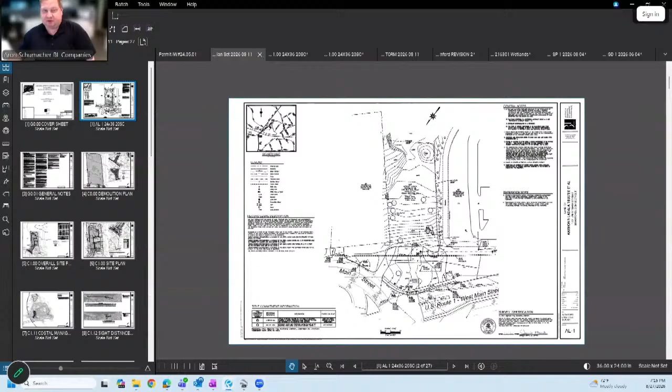This is the survey of the property. The wetlands that Matt mentioned is located to the south of the property, in this back corner, and that's subject to the upland review area.

We prepared this overlay of the old plan and the new plan. What you're seeing here in black and white is our current proposed site plan. What you're seeing in red is the previously approved site plan. And this magenta line is the upland review area coming from that off-site wetland located to the south.

So as Matt and Jamie alluded to, the main change here is we had a 1,735 square foot building. We've removed a bay from that, and we reduced the building to 1,335 square feet. Along with that, we've reduced the parking and impervious area on site and reduced the stormwater drainage system as well.

So you can see we've pulled back the limits of paving in the rear of the property. This is the old dumpster area. You can see everything shifted over, approximately the width of one parking space closer to the interior of the site. Most of the street side of the site has remained the same.

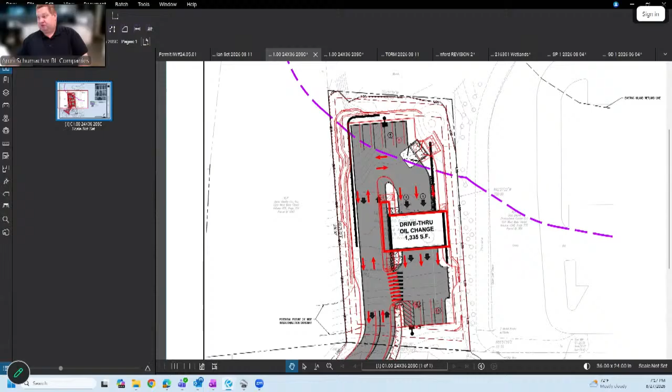As far as our coverages within the upland review area, we have approximately 4,000 square feet of area. Our disturbance previously was 2,000 square feet; we reduced that by about 800 square feet to 1,200 square feet. Of that, the impervious or permanent disturbance that's going to remain is 1,163 square feet, a reduction of about 780 square feet from the previous approval.

Just a quick recap on what the site is: you have the entrance here. It's going to be a drive-through oil change facility. Customers come in, loop around the back of the building, come through the building, get their oil change, and leave out the front. The parking on site is mostly just for employees.

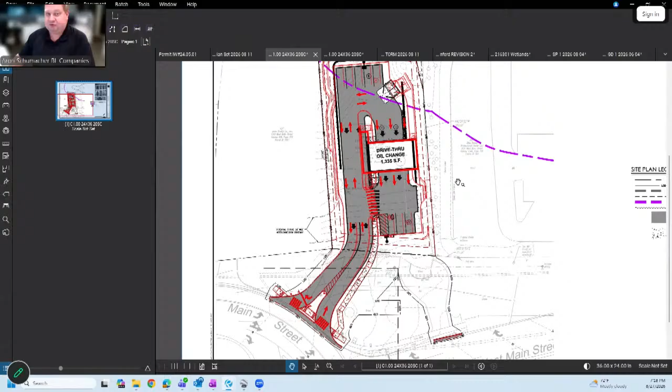You're muting. Oh, sorry. Can you hear me better now? Yeah, thank you. So the customers will mostly remain in their vehicles, just passing through as they're getting their oil change. The parking on site will be used for the employees and the staff.

I have another graphic here that shows the extent of the storm drainage and grading. Same thing as the last graphic - the red is the old proposed design, and the black and white colors are the current proposed design.

Previously there were two proposed underground infiltration systems, one to the rear of the property and one in the front. When we revised the plans and stormwater calculations, we reduced that to just one system in the front and removed the rear system.

We're still meeting all the standards of the Connecticut Stormwater Quality Manual as far as reducing peak rates and total volume for all storms, and we're meeting the water quality volume by infiltrating on site. We use an isolator row within our underground chambers and a hydrodynamic separator on site to help with water quality.

We did receive some comments this week from the town engineer, a few pertaining to sewer, so we'll work through those with him and the WPCA regarding permission to access the sewers for this site. He also had a comment about the stormwater report.

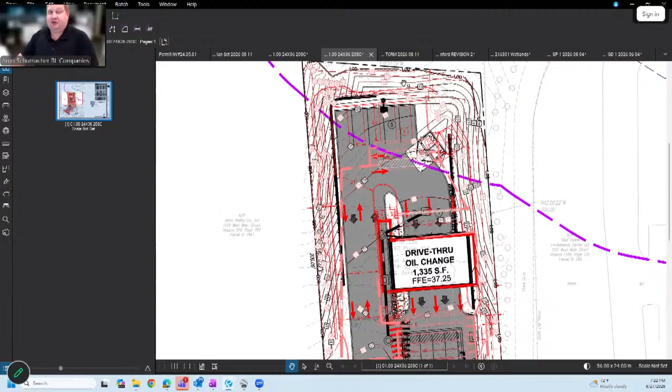Commissioner Boda asked: so those paved parking areas are all draining toward the infiltrator? Yes, let me show you on our proposed plans. This is the plan set that we submitted to you guys as the revised plans.

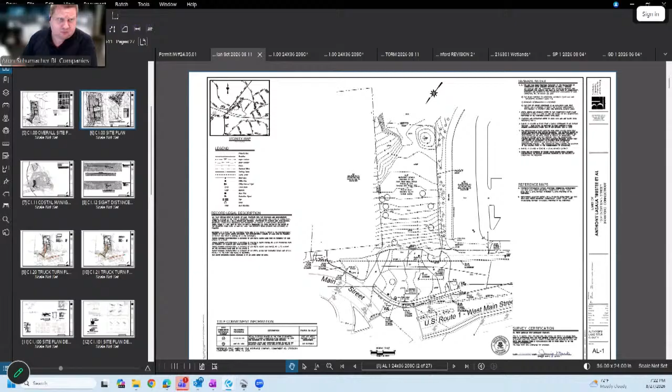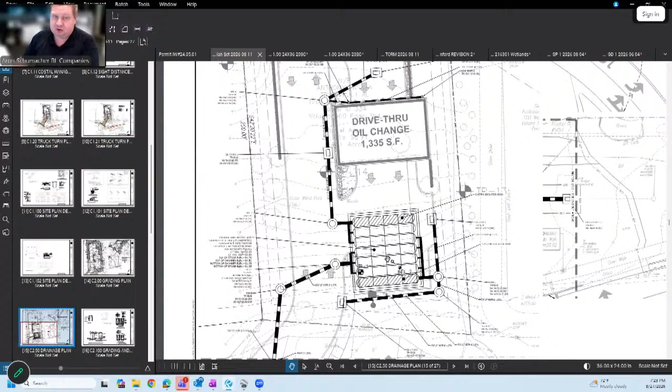This parking area here is all coming to the front of the site, discharging to this catch basin, which goes through the isolator row, through the underground system, out through the hydrodynamic separator, and then out to the front of the site.

If we look at the grading plan, the only area still discharging to our rear discharge point is this grass slope below the retaining wall, off the edge of the parking lot. Commissioner Boda confirmed that answers the question.

Is it curbed on that back end, the eastern side? This piece here would be curbed, yes. And what is that box structure that looks like TP1? This box structure here is our dumpster enclosure for the site.

The wetland line is back there. Is there anything preventing materials from the dumpster from moving back downhill? Things get blown out and tend to find their way to wetlands pretty readily. We are proposing that our dumpster would be in a fenced dumpster enclosure, which would help keep the trash in the trash area.

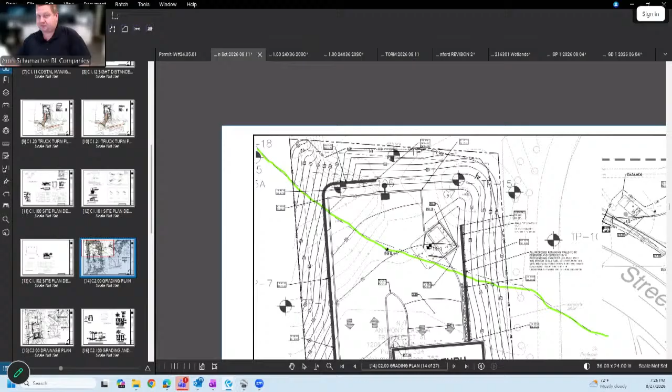Commissioner Boda asked what the intervals are on those contour lines, since it's hard to tell from here. These contours are graded at a 3-to-1 slope, so the slopes below these retaining walls would be 3-to-1. If you're looking at scale, there it is - thank you - yes, there's 3 feet between these contours.

Thank you. Okay, do you guys have any other questions?

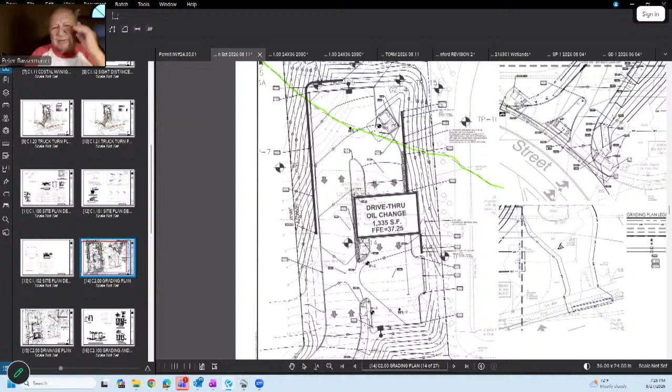This is Commissioner Bassermann. Mr. Schumacher, the retaining wall at the rear of the property, is its purpose structural, or is there anything associated with stormwater? You said that was grassed area before the retaining wall?

So our site is higher. The purpose of this retaining wall is to allow us to tie back in, since we're higher than the existing grade. And how tall is the retaining wall?

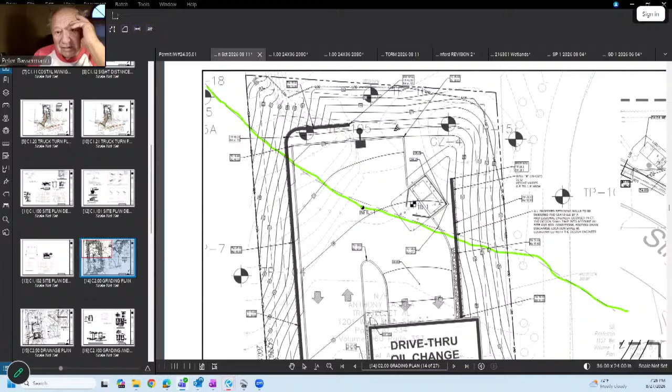This wall is approximately 7 feet on the corner here.

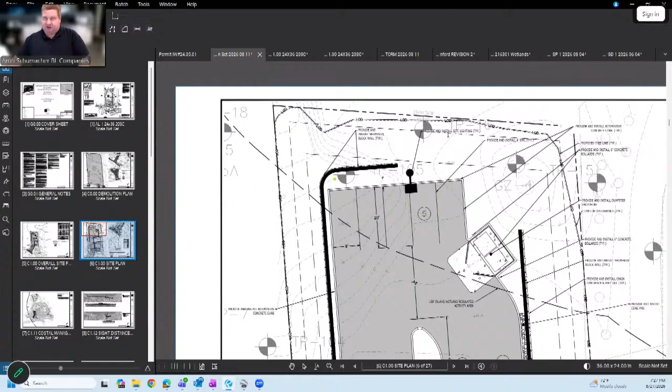And the area where your cursor is, now keep going up - that's grassed area there, behind that line? Yeah, so that's all this grass area? Let me show you on the site plan. So this is our curbing and edge of pavement. This is the wall we were just talking about, and then this would all be grassed up until our limit of clearing, shown here.

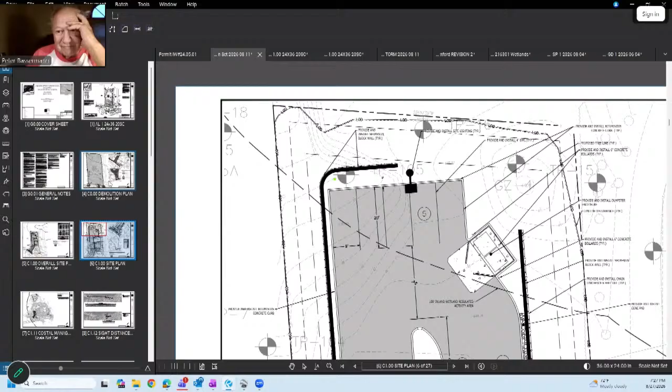And if we get these 100-year storms, is the stormwater management plan going to be able to handle a lot of water in that very small area? So we're reducing the current runoff for the 100-year storm.

So under existing conditions today, there's more area discharged into the back of the property than there will be when we're done. So that's how that reduces that discharge. That makes sense. So we're reducing our main discharge for the stormwater out the front of the site after it goes through the underground system.

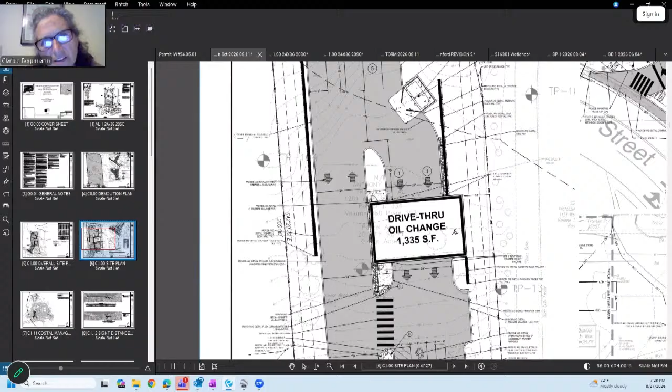This is Commissioner Bergmann. I have a question about the elevations at the rear. I thought you said the area is higher than the surrounding land, but at the very back, if you scroll and make it bigger - not this one, the one before - where you had like 48 feet up to 50, on the grading plan? Yeah, hold on, I can go back for you.

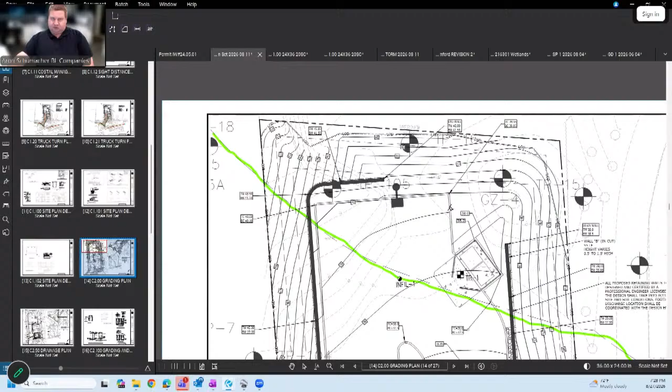You have to make it a little bigger. So from the edge of the driveway at the back, or the pavement at the back, it goes 43, 44, 45, 46. So the land is actually sloping up away from the parking area in the back.

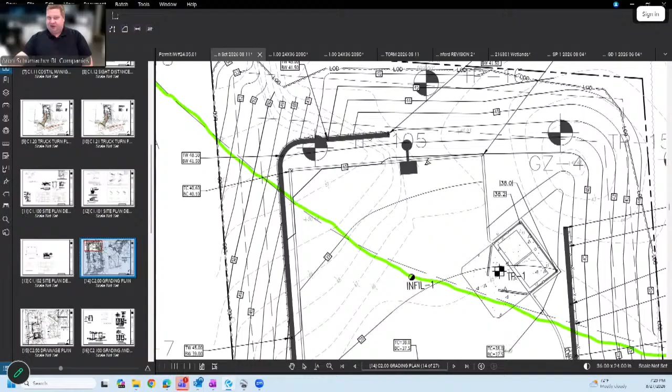So what I'm saying is, under existing conditions, we generally slope to the front of the property. So to get tied in, there's a hill here and there's a hill over here. We're starting to go back down, and then there's a saddle in the middle.

This is Commissioner Bergmann. In terms of the way the water is going to flow, we were looking at the water at the back on the grassy area going downhill somewhere. My understanding at first was that it was going toward the wetland, but it's actually flowing toward the building, around the building, and to the front.

Yes, so this water - yeah, I guess I was misleading to say that this whole area is going there. There's only a small sliver that goes to the back, right? That's existing basically. Aaron, why don't you show them the survey real quick? Bring it up so everyone's aware.

We obviously want to balance flows. If Aaron brings up the survey, you can see in existing conditions there's a small high point in the back of the site now that pushes water towards the wetlands, and then like 99% of the site goes towards the street. In the proposed conditions, the area that goes to the back is even smaller now.

And anything that's improved - retaining walls, buildings, pavement - goes to the front. So anything that touches impervious surface, as Aaron explained, is going through the system. A small portion of landscape area is continuing to the back, as it does in existing conditions. So the development is in a bowl, and there's a landscape hill in the back. Some of that hill goes towards the rear, as it does today.

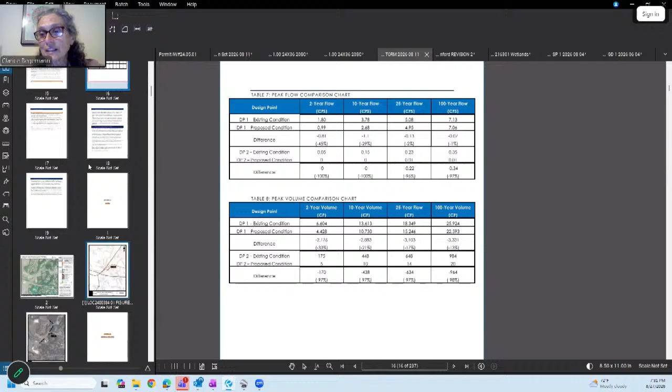Commissioner Bergman: I'm only asking specifically because that wetland has had an issue with being too dry after - if I'm correct, people may remember with the neighboring property, when that wetland was changed, it ended up being not as wet when they created the wetland. So I don't think we want to do anything that decreases the water going to that wetland, in my thinking.

So I think the area we're talking about in the back is very minimal. I can pull the numbers up for you in just a minute. But if you look at this, this is the drainage area we're talking about under existing conditions today that we would send towards that wetland. This DP2, right, is this small piece that's labeled EDA2.

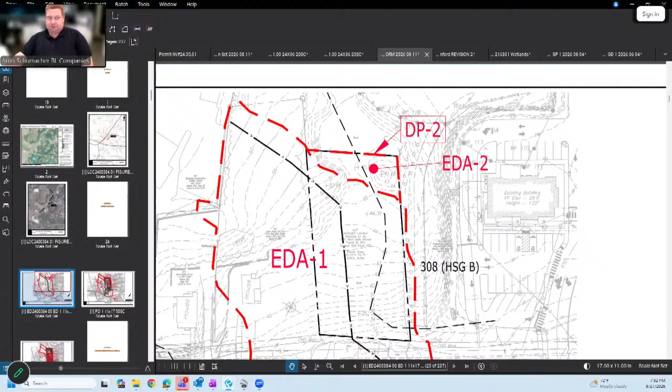And Aaron, remind everybody that this is now less impervious than it was before. The one that you guys approved 2 years ago had more impacts in that area, more paving, more dumpster, more concrete. Now it's more landscaping. So it's a reduction of impacts in that drainage area and in that upland review area.

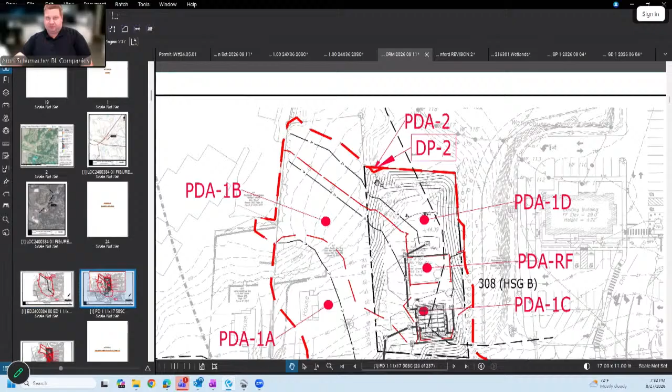So then, going to propose, the area we're talking about is this smaller area. We've reduced it by this piece that would go to design point 2, basically. And then I can show you what those numbers would be.

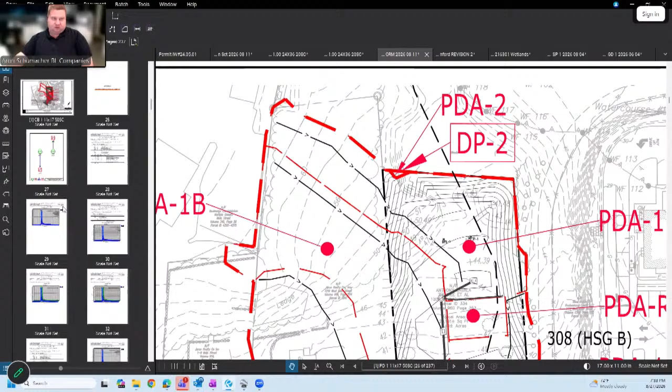Commissioners, as Aaron's grabbing that up, the amount of water going to this wetland is very, very minimal from this site. This wetland is mostly fed by other adjacent, abutting properties.

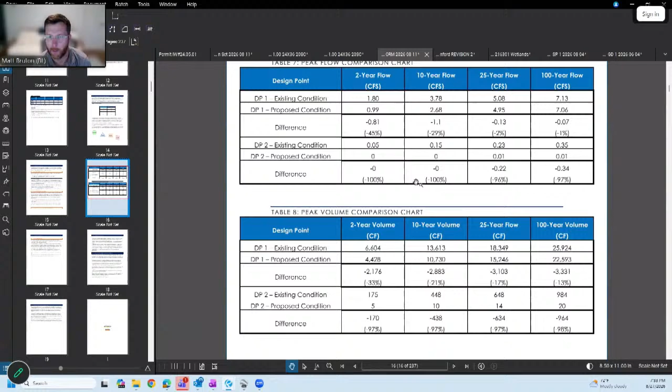Commissioner Goklowski: Are you reducing the project size by about 25%? Is that what I'm seeing here? Commissioner, I think it's hard to answer that question because we've shrunk the building, we've shrunk the parking, so in what regard are you referring to the 25%?

Well, I'm just referring to the overall project. You're reducing the number of parking spaces, you reduce the size of the building quite extensively. So you're just shrinking what we've already approved, is that basically what you're doing? Absolutely—building smaller, parking smaller, retaining walls smaller across the site, and specifically in the upland review area. Okay, thank you.

Design point 2 is what we're talking about, at the rear of the site. So under your smaller storms, your 2-year up to the 10-year storm, we're looking at less than 500 cubic feet of water basically going to that rear wetland that we would be reducing. You can see the amount going to the front is much larger.

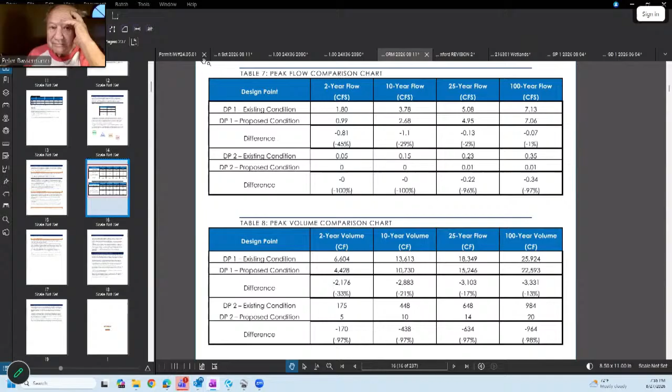Commissioner Bassermann: Did you guys have a wetland scientist look at this at all, or was it just an engineering review? Commissioner Basserman, this wetland isn't on our property. Right, but BL had experience with the adjacent property, which is the Aldi's development. So we had some data that the client was able to share, so we had the location of it. Again, this wetland is not on our property, and it was previously approved and was shrinking.

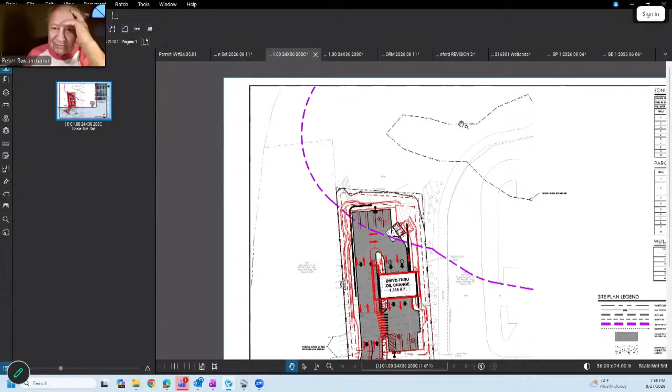And that area where your cursor was, is that a mitigated wetland area? In other words, was there a redo in that wetland area, or did we leave it alone? Jamie Frederick, wetland agent: there was an impact to that wetland as part of that development. The mitigation was conducted elsewhere on site. Gotcha, thank you.

Yes, I think in general we think this is a win-win for the town and the applicant. This is a very small site, and we think we've come in with the smallest possible user, and we're hopefully coming back to you requesting to go even smaller, which is a rarity in this industry and probably not what you guys usually hear. So we want to reduce, and we think that's overall a benefit, but we're happy to answer any more questions if you have any.

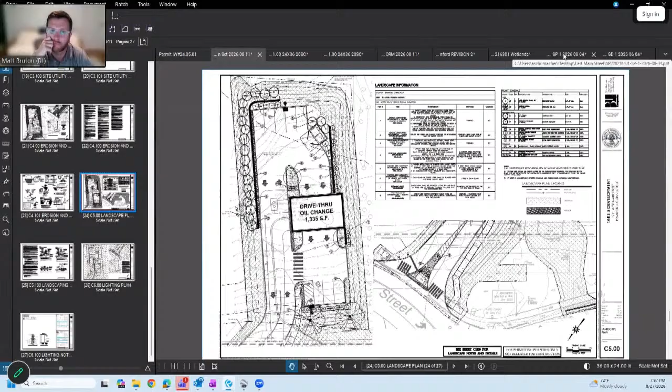Any other questions from the commission? Commissioner Boda: I was just going to say, I think reductions are good—always less impervious is better. I do share Commissioner Begeman's concern about desiccating a wetland when you just showed those numbers, which looked like a significant decrease in water to that wetland. It's just a little—it has my attention as being a negative impact.

Yeah, because you've got existing conditions—let's see, that was DP2—so you're starting at 175 cubic feet for the 2-year volume, and you're going down to 5 cubic feet.

Yeah, that would be my concern at this point. To Chairman Basserman's question, it would be helpful to have perspective from a wetland scientist just address that concern. I don't know if other people are hearing that feedback, but anyway, it would be helpful.

Commissioner Boda, I hear the concern. Again, I think this is a very, very tiny area of our site that does contribute to that wetland. I think a wetland scientist would agree that this would be minimal. We can get one on board if you guys think that's necessary, but I know this applicant is really looking to move forward after the 2 years. We've had that other plan, and we really want to keep moving forward, to take advantage of this time of year and the weather before we have to go to planning and zoning and back to DOT before we can start construction.

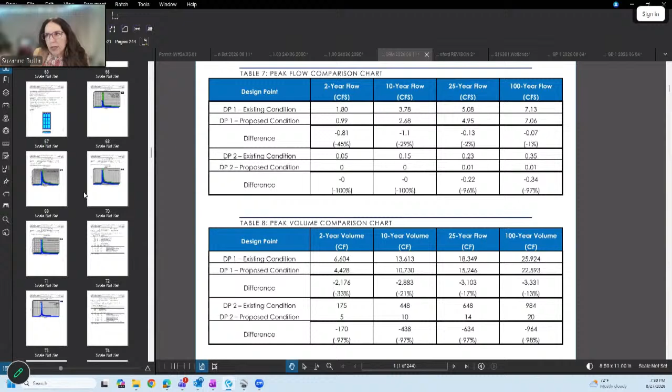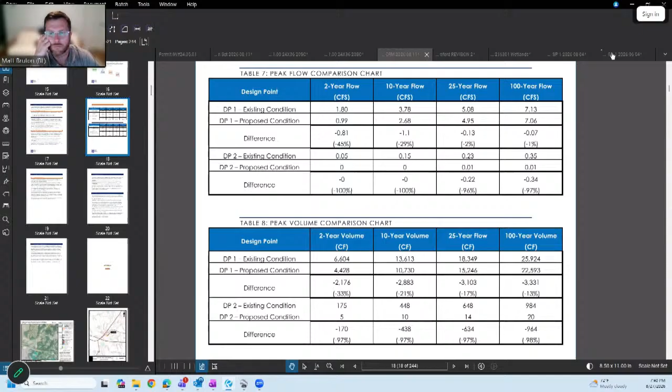This is Commissioner Boda. That's certainly understandable. I think saying that it's minimal, these are just raw numbers and there's no context to them. So in terms of the scale of what is going into the wetland, like what kind of cubic footage is typical of that wetland in general, it would just be helpful to put those numbers in context. Are you talking about a 2% change to the wetland, or a 10% change of water coming into that wetland? I don't know. I guess this drainage scheme is not different from the prior approved plan.

Yeah, Matt. So here's the previously approved drainage report that you guys approved last time, and you can see design point 2 has a very similar condition with the same reductions, similar reductions to what we're proposing today.

This is Commissioner Begeman. How is 55% the same as a 97% difference? I think we have to keep in mind that these are very small numbers in the world of storm drainage. 175 cubic feet is very, very minimal, for a very small watershed. So I would look more at the number than at the percentage reduction.

But this is Commissioner Boda. I guess those numbers are about the volume leaving the site. And if this happened a couple of years ago, you'll forgive me for not recalling the scale of the wetland and how much water is flowing into it, and therefore what kind of rate of change of volume that is for the wetland. This is about the site, this isn't -- do you follow? I'm sorry, I'm just getting a lot of feedback.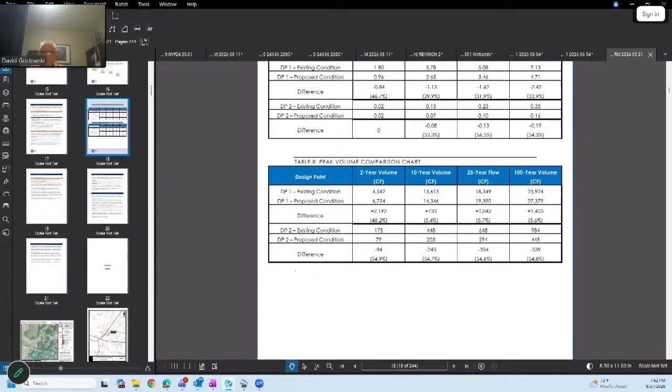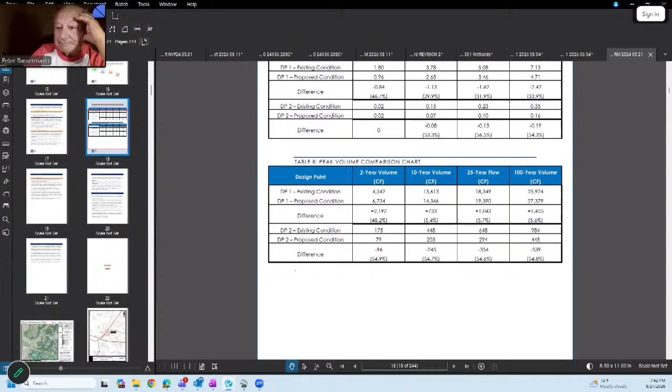This is Commissioner Bassermann, any other comments or questions from the commission? No. So I guess, given your desire to move quickly, I assume we'd be able to review that information at our next meeting and hopefully bring this to a close. Yeah, we can prepare that information in time for your next meeting. Appreciate that.

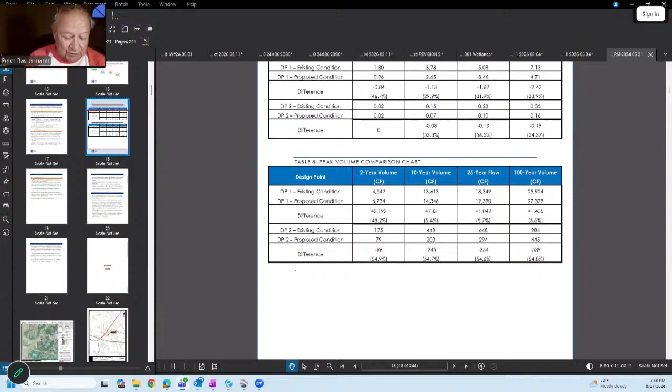Okay, so this site is the 325 East Main Street site. I believe you guys are pretty familiar with the site from the various activities that we've had going on there. Just wanted to start by giving you a rundown of the changes that we're requesting. Mr. Schmitz from our office submitted some plans that I'm sharing here on screen that have keynotes, as well as a memo that references those. So I'm just going to run us through those together. Feel free to stop me if you have any questions along the way. So we'll start with the site plan.

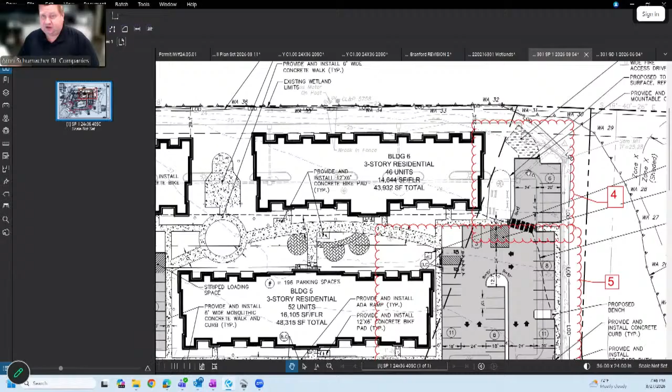Number 4 is back here in the rear of the property. We made some minor changes to the layout and the fire access. Just so everyone knows, this is kind of in the upland review area. The wetlands basically surround this entire property to the rear of the property.

Number 5 also goes along with this rear parking lot. We made some changes to the layout and the routing basically, and the sidewalks in this rear parking lot area here.

Number 6 is also back in this area as part of revising this lot. We relocated the proposed dumpster area to over here. As you can see, the dumpster enclosure shown.

Number 7 equates to the connection between the self-storage building and the residential side. That was removed and replaced with just an emergency access instead of a full paved connection.

Number 8 on the site plan is out here on the front of the site. As part of the DOT permitting, they required some curb ramp improvements, some pedestrian signals, some crosswalks. So there was various revisions kind of to the intersection here that were requested and required by the DOT. So we've made those revisions to the plan.

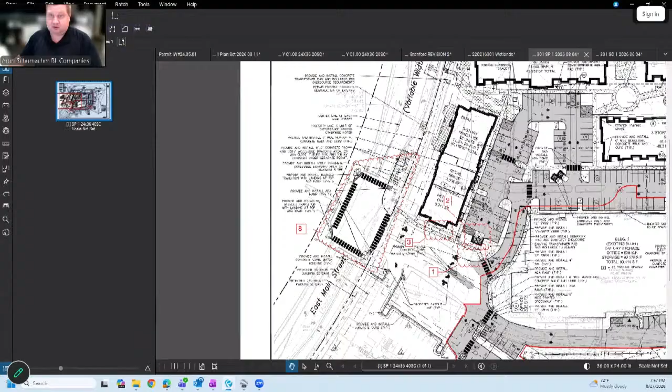The next round of revisions that we have is on the grading and drainage plan. I'll switch over to that similar kind of setup where we have clouded the changes for you in red. So number 1, we revised the grading in that dumpster area where we had that proposed cut through, and along the building, kind of already talked about in the site plan, but we revised the grades there as well.

Number 2. Mr. Schumacher, can you clarify when you say you revised the grades there, you revised them how?

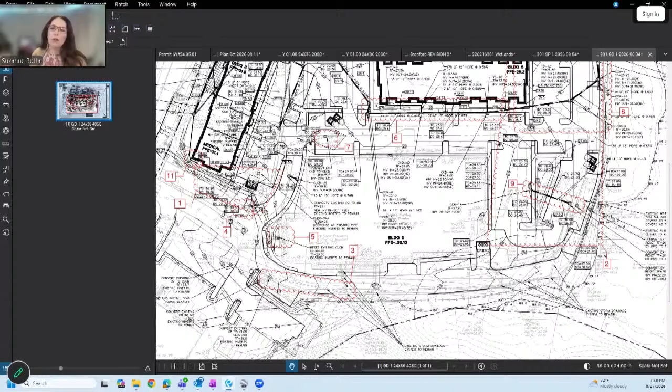So we removed this retaining wall, we regraded the sidewalk. There used to be a driveway here, so we regraded that so the driveway is gone. So you've leveled it? I can't, I wouldn't say we leveled it. We turned this into a 3-to-1 slope instead of a retaining wall. This is now graded as a walk instead of a kind of road cut through.

So I would say that these grading changes were mostly to support that we're now going to have a different use there. So we wouldn't want it graded like a parking lot if it's going to be a sidewalk, or we wouldn't want it to be as flat if it's going to be a grass slope, if that makes sense. Kind of. Okay, thank you. Okay.

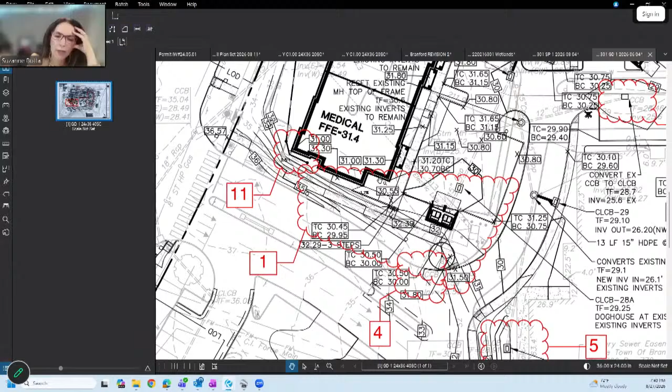Okay, so number 2 pertains to the grading as well. So when we revised the layout and the sidewalks for this back parking lot area, we also revised the grading to make that back parking lot and those sidewalks still work.

This is Commissioner Bassermann. Did we increase the grading? I wouldn't say we increased the grading. I would say that we just refined the slopes. I mean, we're talking about, we might have added a half a foot, taken off a half a foot, a couple tenths. Just minor regrading, I would call it. Because we're fairly close to the wetland there.

Jaymie Frederick, the wetland agent, I would probably summarize the grading changes in that area as promoting drainage to the proposed drainage system. So because the parking lot layout has modified slightly, just making sure that those paved areas are going to convey to the stormwater is the primary point of the grade changes that occurred. Okay.

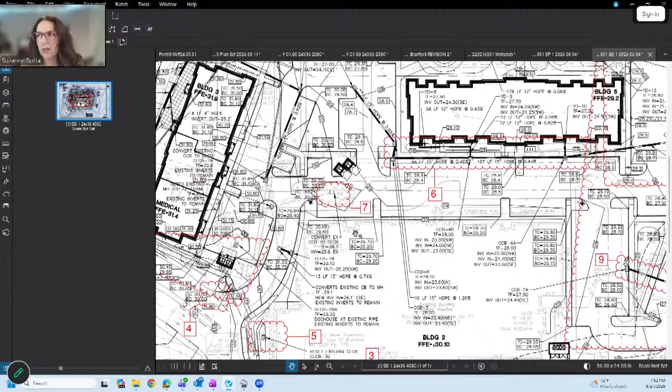So, number 6. Oh, sorry, go ahead. That's okay. I guess, this is Commissioner Bodo, to that comment, is there a change of volume or velocity leaving the site, or some of those, I guess that would be the northeast outlets?

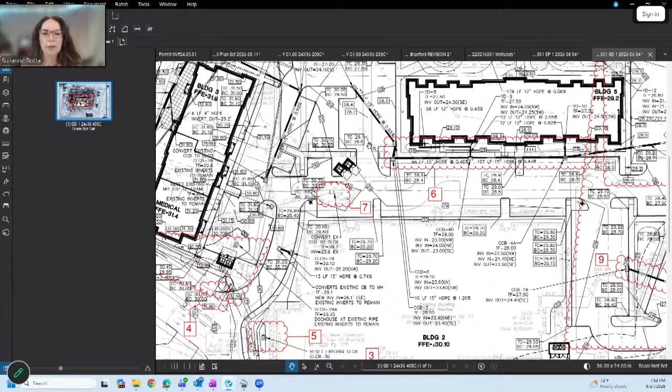This site was permitted through Wetlands and Planning and Zoning and approved based on the understanding that we significantly reduced the impervious area on site. This site was very heavily impervious before we started this project. So we do not have a study of the volume and rate to each outlet as part of this permitting process.

Does that answer your question, or? Kind of, I mean, maybe the answer would be the same, but I'll try to ask it a little differently. This is Commissioner Bodo. So based on the engineering that was approved versus the revisions you're proposing, are we seeing a difference engineering-wise in volume or velocity that would leave the site based on calculations?

So the way we permitted this, as part of this permitting, there are 4 outlets on this site: one over here, one here, and two in the rear of the property. The way we did the engineering was we studied the existing impervious area going to each one of these outlets, and then we studied the proposed impervious going to each one of these outlets. We showed there's a decrease in the impervious area, which, using standard engineering knowledge, means you decrease the runoff rate. So I can't tell you that exactly 20 CFS is going out this outlet - we didn't study to that degree on this project. We just studied the impervious number, and we are matching the impervious that was permitted going to each one of these outlets.

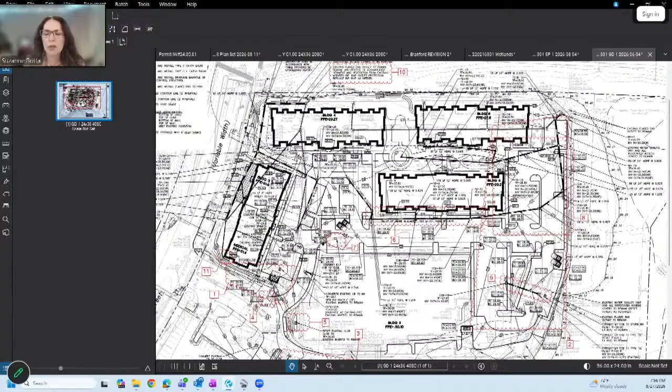I understand. So if we look at this drainage change we made in the front, these catch basins up here in this front area go to this outlet. The change we made associated with number 5 is we rerouted them through the existing piping system to reuse a couple of these existing pipes that also still go to this outlet. By changing that, I didn't change any of my coverage area, I just changed the way it's getting there. Same thing over here with number 6 - I'm not changing any of the areas going into these catch basins, just the point that it's getting into that catch basin. Does that make sense? That does make sense. Thank you, okay.

Number 7 was also along those lines. This catch basin was kept instead of being removed and is still routed through the existing system.

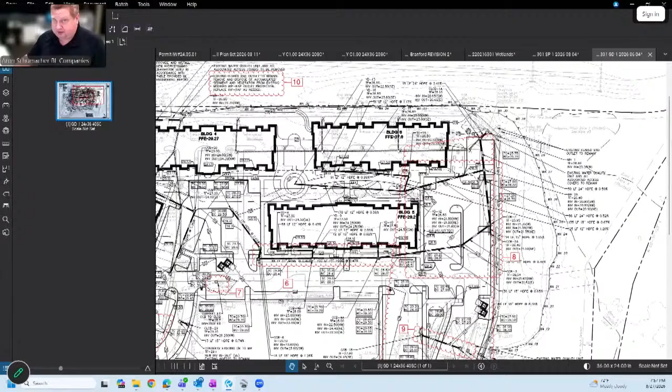Number 8, we revised the routing and the catch basin locations in this piece of the back parking lot. They still have the same area that discharges to this outlet.

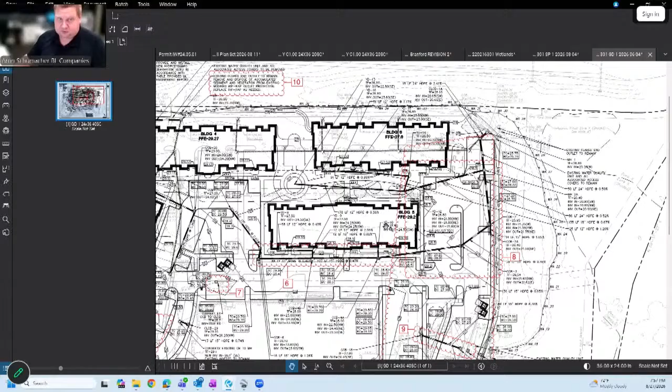Number 9 is kind of the same thing. This piece of the parking lot has always gone to this outlet, so we revised the location of this catch basin and network when we revised this layout, but it still goes to this outlet.

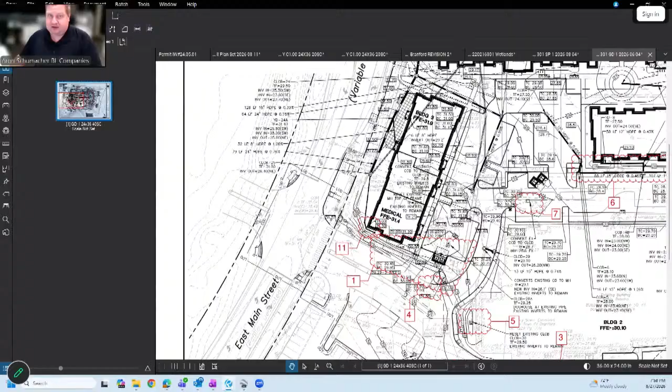Number 10 was a note about the outlet protection the DOT requested us to add. As part of the DOT approval, because we're taking drainage from their East Main Street out here that comes through our property, and that's always come through our property, they requested that we add this note regarding the riprap and the flared end section just to make sure it's in operational condition.

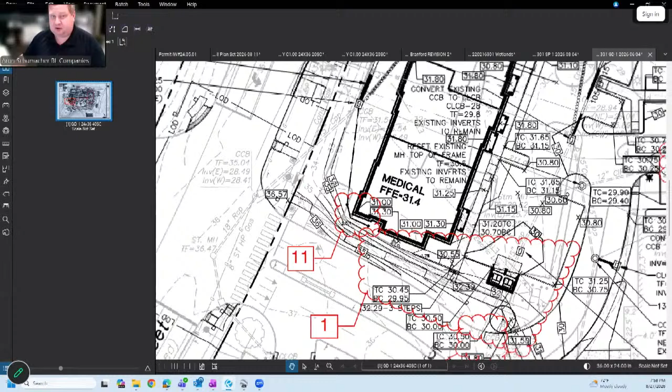Number 11, we added some additional yard drains on this corner of the building that allowed us to get the storm drainage out when we regraded this area.

So that's kind of a quick overview of the revised materials and the changes we've made. Happy to elaborate on any of them further or go back and discuss them further, whatever the commission would like.

This is Commissioner Bassermann. Jamie, I understand the implication of the question. I guess, what do our regulations say, if any, regarding the extent of what a modification is as opposed to something other than a modification when a permit's already been issued?

Jaymie Frederick, wetland agent: I think that falls to the commission's determination. To me, this seems to fall within a modification. If the commission is concerned about the level of information provided, you could certainly request additional information if there's something you think is outstanding. But overall, generally speaking, the project still seems to be in alignment with what was reviewed by the commission. There is, I believe, a minor reduction in impervious area from what was approved.

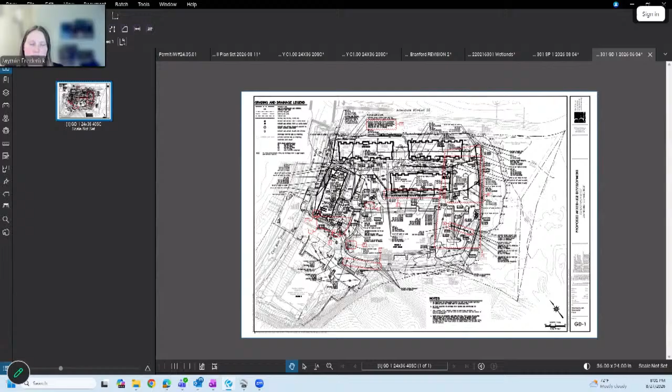...the water velocity, water volume at each of the discharge points? Jaymie Frederick, wetland agent: at this time we do not have an updated stormwater report or stormwater calculations. Okay, yeah, go ahead and share what you were going to. I'm sorry - no worries.

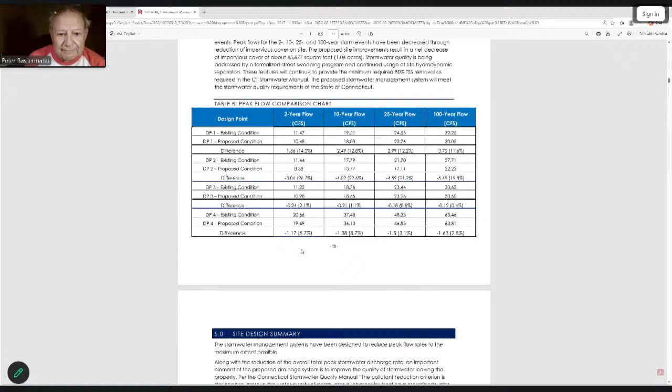All right, is everyone seeing a PDF? Executive summary. All right, okay. So there were four design points, and you can see that at three of the four there were substantial decreases, which is ideal given that a lot of the discharge is directly to wetland area based on existing conditions from the previous development. All four had a reduction, and there were improvements to the treatment train to some extent, and hydrodynamic separators exist within each drainage system.

Commissioner Bassermann: just to be clear, we're looking at a table of existing condition versus - and when we say proposed condition, that's the revision we're looking at? No - the proposed condition is what the commission approved. So we do not have an updated table like this for the modifications.

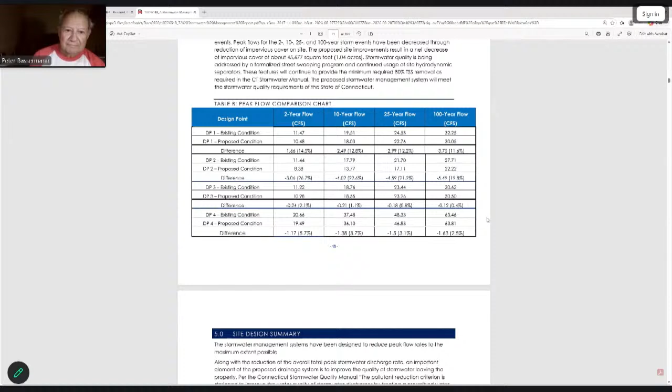I would generally assume the modifications are fairly minor because the amount of impervious area has slightly decreased, and it's not like they connected two treatment trains to create two trains instead of three. That being said, we do not have those numbers.

Jamie, this is Commissioner Boda. Does the town engineer look at this? Do we have comments from the town engineer? We do not have comments from the town engineer on this. Is this something that the town engineer would look at and flag if it was problematic?

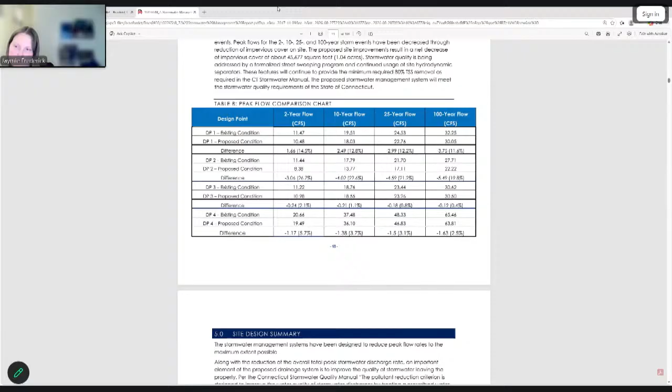We could ask the town engineer to take a look at it. Would you be asking essentially whether or not the updated calculation information would be necessary? Are you looking for that information to be available so that you can look at it? No - this is Commissioner Boda, I think...

...we have limited expertise on the commission. We do not have an active engineer, right? So, okay - I mean, these changes to me, I don't know, they seem fine, but I wouldn't know. Sure.

Does the commission want it to come back after the engineer has looked at it, or if the engineer is okay with the modifications, would you be okay with staff moving forward with those modifications as outlined? And I'm not entirely sure - did we make it to the end? So I don't want to make you make that call necessarily if we haven't gotten to the end yet.

This is Commissioner Boda. I would be okay with that, speaking only for myself, but if the town engineer gave it a once-over, that would be fine. This is Commissioner Goklowski, I feel the same way.

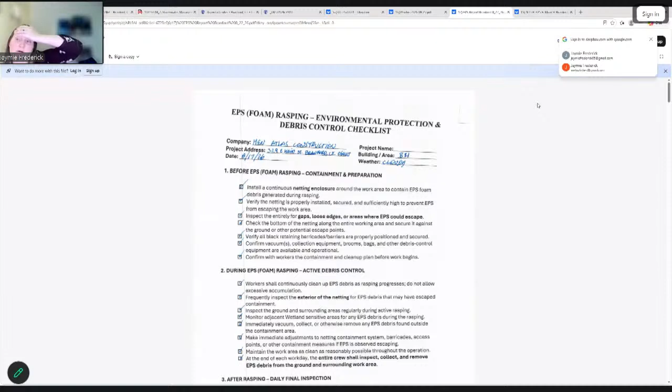Bear with me for one second, I take a lot of pictures. Jaymie Frederick, the wetland agent, while Gwinnell's looking for that... Oh, you got it? Yeah, I have it. I thought I had sent these over, apologies that I did not.

I can share my screen if it makes it easier, and I will send these to Olivia. Okay, just let me know when. All right, so these are my pictures from... let's see if I can pull up the date. So these are from August 19th.

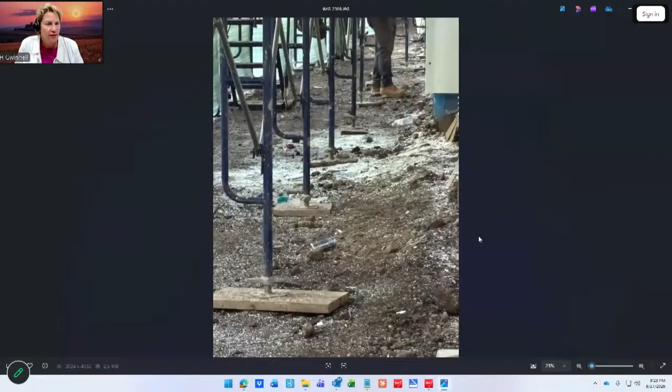There may be pictures of other sites in here, so apologies. So this is some of the styrofoam that I was referring to. Yes, it's there, and it can be cleaned up, and it's not accumulated past this, this is what I've seen most of the time. This is the outlet. So that's about the amount of styrofoam that I see now, and it's sitting on the water, which you can see is obviously clear.

Mr. Bassermann: Just to be clear, that was the 19th of August? This is the 19th, that's correct. Okay, and the one that we had looked at previously was today? Correct. So this is the outlet up by the street, the one that was most problematic for styrofoam purposes. Then the outlet that you looked at today was the one in the back corner.

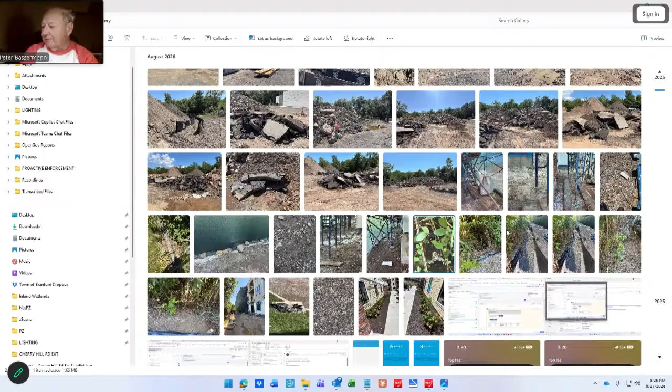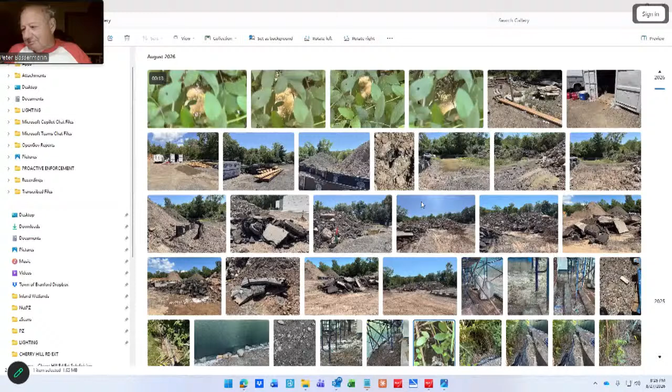I'm not sure I understood correctly the monitoring reports. Are we getting them as per instruction, or is that not being the case? They have been doing handwritten reports every day, and I got last week's yesterday. So as long as they keep going, then that would be appropriate, that I receive them once a week, but they're actually doing these things every day.

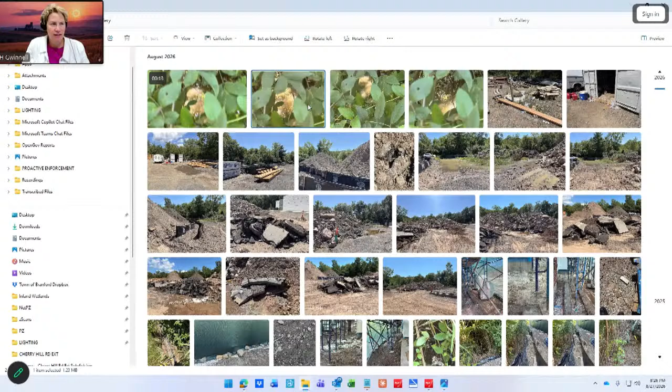Wetlands Officer Gwinnell: These pictures, which I think you can still see, this is the same outlet on the 19th as the picture I showed you today. So this is the same water, just it has not improved.

This is Commissioner Bassermann on the meeting on August 13th.

I believe Mr. Vigliotti had said that all the styrofoam beads have been taken out of the waterways, that it had all been cleaned up. That hasn't occurred, and so I have a question about that.

The other thing is, when you show the picture, the little styrofoam beads in the dirt at the base of where they're working, that looks to me really difficult. Can they vacuum that up without having to vacuum up all that dirt? To me, that isn't a very good solution, to have the stuff just going onto dirt.

I don't know what it's like at this work site. They didn't have the screening, they had the green screening. They need the black, or vice versa, whichever it was, with the smaller holes so the EPS couldn't get through it.

I know they said they would either vacuum or sweep this stuff up at the end of every day, but you're saying it's getting tracked around the site, which means it's going to be in the land, and we don't want that. So why can't they put down tarps or something that they work on, and then it wouldn't be in the dirt, and it would be a lot easier to clean up whatever ends up on the ground?

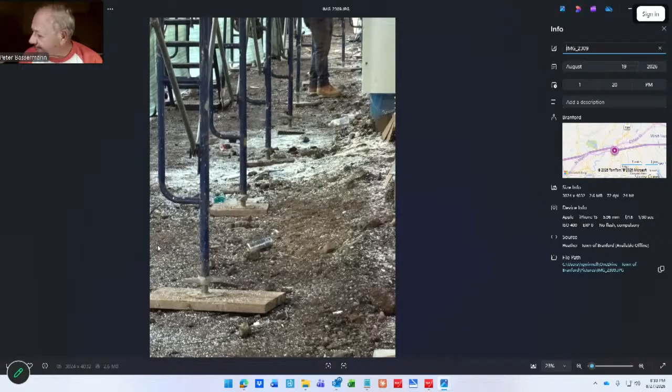I buy that. This is Commissioner Bassermann. The incomplete cleanup, what does the commission do about that? In terms of the EPS in the waterway, Heather, I think you said that there was some right there that you took the picture of, and then you look down the little brook and it's on the banks.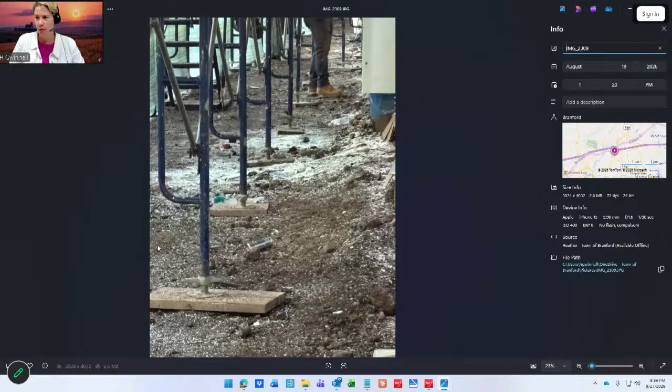Enforcement Officer Gwinnell: I do not have the expertise to outline what would be the most appropriate and least damaging way to clean that up. This is Commissioner Bassman. My question is, what does the commission do when somebody who is supposed to clean things up says they did, and you still see it there? What action can the commission or the enforcement officer make at this point?

Enforcement Officer Gwinnell: I would honestly have to defer to Jamie or past practices to make suggestions. Jamie Frederick, the wetland agent.

I think that there are multiple layers at play. I have not been out to the site anywhere near as often as Heather has been. It's possible that a cleanup event occurred and more styrofoam was introduced to the watercourse. I don't know the extent of the cleanup that occurred in the wetlands. I know the wetland does extend onto state property.

We did have a wetland scientist go out and take a look at the wetland, and they presented at the last meeting. If the commission's looking for a further impact assessment of the wetland and whether additional cleanup activities are warranted beyond what can be seen from within the limits of disturbance, which appears to be where that inspection occurred, I think that definitely needs to be conveyed to the property owners sooner rather than later, along with what your expectation is.

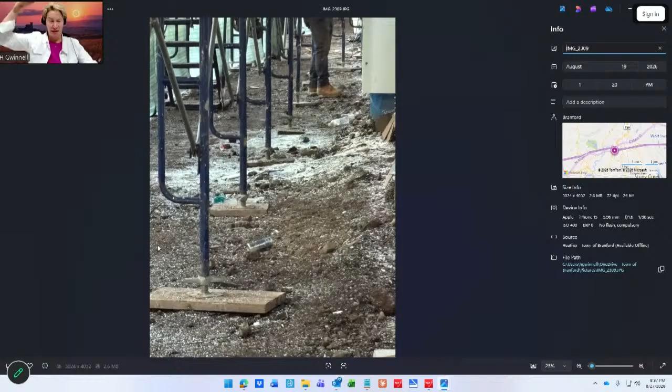The scaffolding is up against the side of the building to the roof line. The plastic sheeting, the green that you can see here, is attached to the outside of that scaffolding all the way up. So it's draped on the bottom all the way up to the top and then over the top of the work area, so that it's being contained within it.

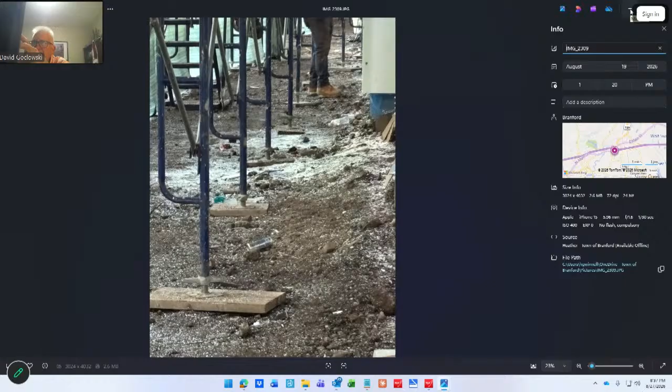Okay, so that styrofoam we're looking at is not getting blown around the property like I originally thought. It's being contained in that area. So if they're cleaning it up at the end of the day, they're doing what they're supposed to do. The only question is, are they cleaning it up at the end of the day?

Correct. This is an example of how it's being anchored at the bottom, and this is what it looks like on the outside of the building. So you can see within this is the work area. So they took steps to contain it.

They have definitely been taking steps, Enforcement Officer Gwinnell, yes, to contain it. The only question I would have is whether they are doing enough regular cleanups and not just waiting until maybe the end of the week or something. That might be a point, and tarping across the ground could easily be added and would be appropriate. Okay, thank you.

Mr. Bassman: I'd like to hear from whoever is familiar with the site, who's representing the site this evening. Commissioner Bassman, for the record, my name is Aaron Schumacher, again with BL Companies.

I'm familiar with the site, though I'm by no means an expert on the styrofoam issue. I do site civil work, but it's my understanding from the applicant that they have made an effort to clean up the wetlands. It sounds like that might be the commission's wish that effort be taken a little further, maybe with some additional hand cleaning. I believe that was the recommendation of our soil scientist, Mr. Sagan, who spoke to you guys last month. So we can certainly convey that, to do some additional cleaning to try to get some of those areas noticed with styrofoam where it's reached the wetlands.

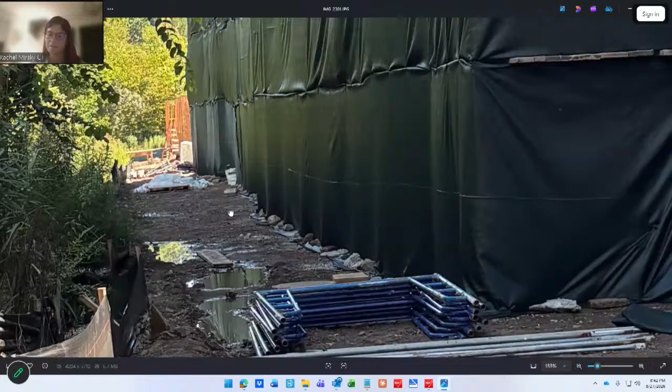Commissioner Mirsky: I just have a question about this image, and I want to clarify my understanding, Officer Gwinnell. I couldn't tell from the other image with the plastic sheeting, is there any concern about the way it's being held down? I only ask because in this image, it's a little far away, but it looks like some areas by the corner might be near the building. So my question is, they're using stones or some material to keep it down, I'm inferring. Do you have any concerns about sufficient material keeping the bottom down, or any openings where it might not be flush with the ground? It doesn't look like it, but I was just asking for clarification.

Enforcement Officer Gwinnell: When I walked around this, it was much as you see, it is anchored down at intervals allowing maybe 5 inches between stones, something like that, and it does seem to be anchored. The only thing I was going to suggest to them tomorrow is if they have a 2x4 or some other piece, maybe a long metal pole, laying that first to make it rigid, then putting the stones on it to keep it down. I was going to say tomorrow that's what they should do, but it does need to be anchored down somehow. Otherwise, even the activity of guys jumping off the scaffolding can create enough of an air burst to push it out. It's a heavier tarp, however they are in there using tools and potentially vacuums, so I would definitely not want it flapping or loose.

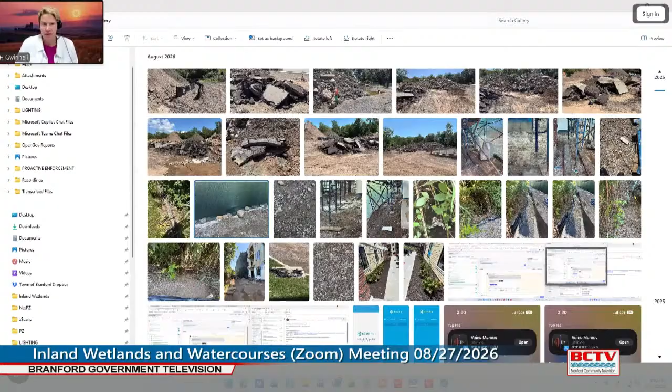This is going to Commissioner Bassman. So Jamie, is this an uphold and continue, or continue and uphold? What's the appropriate language?

Jamie Frederick, Inland Wetland Agent: I don't think you have to, unless you're essentially making a decision. I think you can continue it, understanding that you want an update on the information we just discussed. I don't think you have to make any decision at this moment beyond making sure there's clear direction to follow up with the property owner. It sounds like Heather has her list, but if anything was omitted, make sure she knows.

I would also ask the commission whether you want to continue this matter to the next regularly scheduled meeting, September 10th, or the subsequent meeting. We have a lot of items on our September 10th meeting, so I understand the commission wants to make sure this stays on the correct track and that we get things improved. My question is: do you have immediate concerns that need an update in two weeks, or do you want to see how it goes and hopefully get a good report back in a month? Olivia Sandberg is correcting me that September 24th is the second meeting.

This is Commissioner Godlowski. I think if there are any urgencies within the next couple weeks, Enforcement Officer Gwinnell would bring it to our attention to add it to the agenda if needed. If not, moving to the following meeting is okay by me.

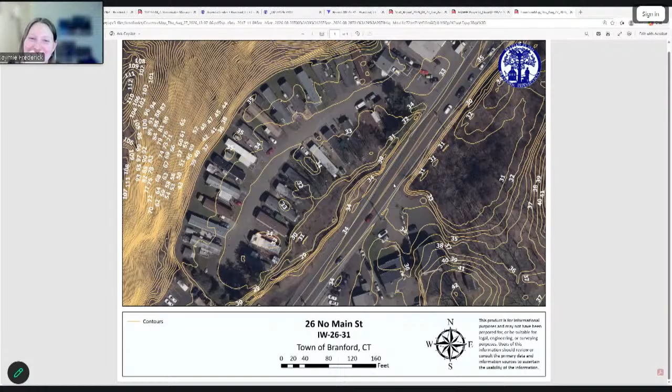So it's unit number 7, which is about... okay, you can see my mouse, right? No, we cannot. So Jamie Frederick, Inland Wetland Agent, I'm just going to share this. You can see your cursor momentarily. It's small, but you can see it. Yeah, I think you're seeing mine. We see a cursor. Yeah, you're seeing my cursor. There it is, number 7, right here.

So this is the right third, near the D? No, right near the R. Near the R, is that it? Yeah, this is number 7.

This is Commissioner Godlowski. Wasn't there a removal of the old building that came before the commission, Jamie? Yes. So it would be a new one? There was an application a year or two ago for some replacements, and this is for another one.

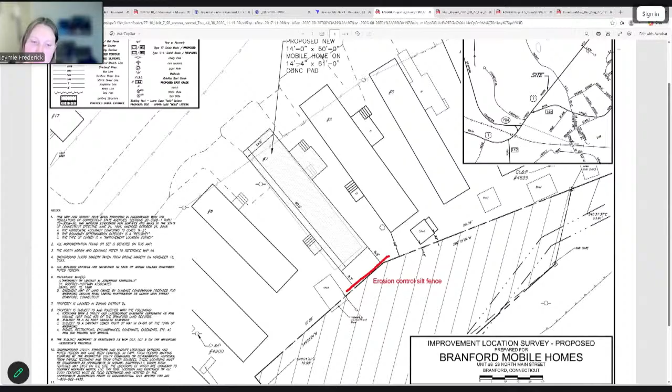Okay, here's unit 7, the proposed unit, with a small deck and some access points, and proposed erosion controls along the property line. The wetland is off-site, between the subject property and Route 1, and the water course component of the wetland is shown on the site plan. The wetland itself has not been delineated; however, this area is higher than the wetland, so it's all within the upland review area.

Fairly straightforward replacement. You can see the old unit underneath that they're looking to replace. Essentially we would be proposing an erosion control inspection, a final inspection, and a planting inspection, because they are proposing to plant a row of arborvitae to the rear of the unit.

Commissioner Begeman: They're putting in a concrete slab. Was there no concrete slab before? And just to understand, is that now the standard that they have to go on a concrete slab? Yeah, well, for HUD approval, new homes have to be set on a concrete slab.

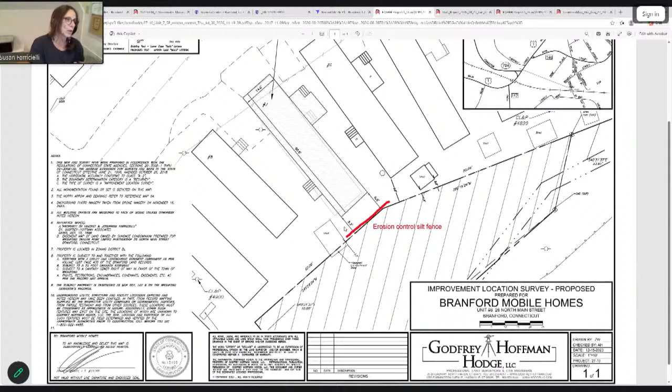Thank you, it's much better. It's much easier to maintain the homes. We don't deal with the skirting sitting on the dirt. The homes can sink a little bit, they settle, and then the skirting, when you mow the lawn, if there's any rocks, it makes holes in the skirting. It's a real mess. So even though there's a big cost involved in putting the slab in, it's better for the home. It just makes everything last longer and in better condition.

Commissioner Begeman: So when people are pouring concrete, what is the erosion concern? Is there anything needed more than erosion control? Jaymie Frederick, the Wetland Agent: The silt fence will be in place when they're pouring the concrete and when they are revegetating any ground disturbance from that activity, because sometimes the lawn around that area can get impacted, so they might have to reseed a little bit. Once that work is completed, we would say that they were good to remove the silt fence.

Commissioner Begeman: Just because I don't know, with this size of concrete pad, they don't have a washout station for the concrete machine? Jaymie Frederick, the Wetland Agent: We've never required that on this size project before. Commissioner Begeman: I figure that if concrete is being washed out of some container, it can't just go on the ground, so that was my question. I believe there'll likely be a concrete truck, and once the pour is done, the truck would move on to its next job.

Yeah, thank you. Commissioner Goklowski: Do we have a staff report?

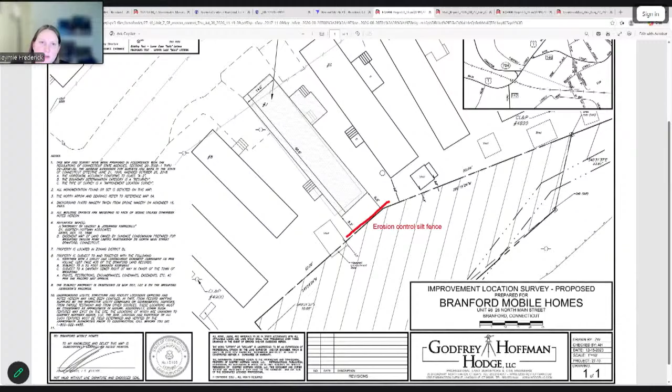Yes, we do have a staff report that Olivia was very kind to draft up, overviewing some of the past permits that were issued, as Commissioner Goklowski alluded to. Erosion controls to the rear of the lot, no stormwater management is proposed. It is replacement of pretty much an existing condition for the most part. They are proposing removal of a stump and replacing with a row of arborvitae to the rear of the lot. Again, we're proposing initial erosion control inspection, planting inspection, final inspection, standard conditions, and general provisions of all permits.

Commissioner Bassermann: Jamie, the plantings were part of their plan, not part of any condition that we wanted to see, or is that not true? That was applicant proposed in their project narrative. Yep.

Commissioner Bassermann: Any concerns from the commission on this replacement? If anybody would like to make a motion on inland wetland 26-31.

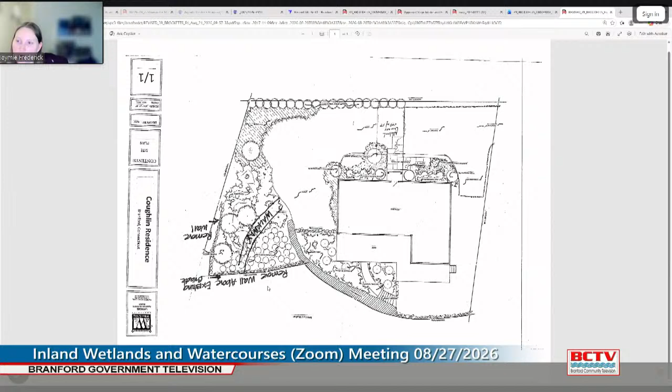So at this point, I would say the commission would typically want an updated planting plan and probably some more details on how this wall is going to be replaced, rather than a simple call out that it's to be removed. Although it does say remove wall, it doesn't say replace wall. Could the applicant clarify whether they're proposing to remove the wall and replace it? That was my understanding, but I may have misinterpreted.

Yes, the biggest problem I'm having is I hired a civil engineer to give me an official drawing of where the CJL was and everything like that. I've talked to a structural engineer and he's having trouble getting into this with all the invasive plantings. You have to climb down and walk over the rocks to see it. I've hired a landscape architect, and I will submit plans for landscaping, and I have a structural engineer, and I'm going to do a plan to see what I'm going to do with this wall.

5 feet of this wall is above grade, which is useless as far as I'm concerned. It wasn't built properly, and the footing, the last 5 feet down, is undermining. It's either got to be completely replaced or whatever. So I will have drawings on that.

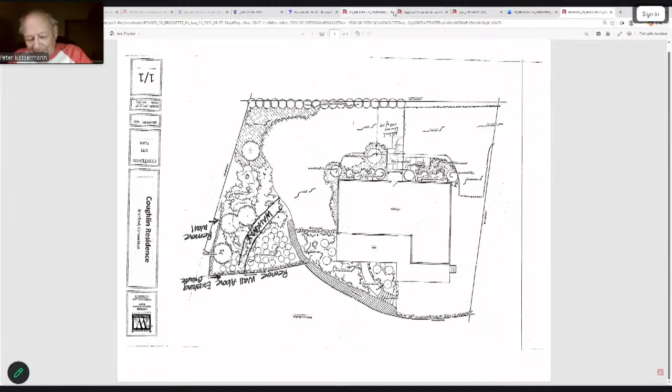Sounds like there's quite a bit of work to be done. How much is going to be done in phase one versus phase two? I don't think, especially at 9:15, we want to start designing this thing here.

Jaymie Frederick, the Wetland Agent: I'd be happy to meet with the property owner out there to discuss next steps if you'd find that helpful. But we're definitely going to need details on what is being proposed in order for the commission to be able to act on this application.

Is the commission comfortable with me meeting with the applicant, and if there are invasive species, identifying that those can be cut for investigatory research purposes? This is Commissioner Goklowski: I was going to suggest that if you are meeting with the applicant, and it is invasive species...

We have to start somewhere, and if he wants to start, we can do it. You can't go in there if it's covered, you've got to start clearing it out so you can see what's got to be done. So I don't have a problem with you doing a check and giving him some parameters to take care of the invasive species, and then we can move to step two.

This is Commissioner Bassermann: is there general agreement on the commission that that's a good first step? Yes. All right, I guess that's work to do.